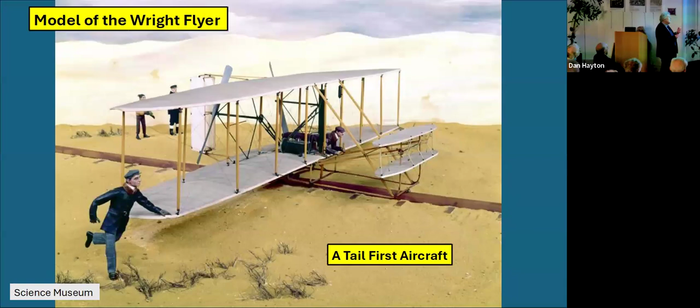Well, here is a better picture of the Wright aircraft, and we see Orville lying down, manipulating the controls, particularly the position of this tail here. All the Wright aircraft were tail-first, and this gave them very good flying properties, but it made them, particularly in the way they had the center of gravity of the aircraft, difficult to control.

I had to resent this comment about me taking up an interest in aircraft latterly - I've always been interested in aircraft, always. I didn't join the aircraft industry because I didn't think I'd got the mathematical ability to be there. But you see the kind of thing I was doing: this is round about 2004, when I wrote to the London Review of Books about a book which had just come out about the Wright brothers. Can you click?

What I said was the Wrights designed their aircraft to be unstable, knowing that with good controls like wing warping and rudders, they would be as easy to fly as the bicycles they had made. This was perhaps an overstatement - they didn't really understand about stability. What they did understand is that if you had good controls, you would have a safe aircraft. Like if you've got a bicycle with good steering and you've taught yourself to cycle, you've got something that you can fly, you can ride, and if it's an airplane, you can fly.

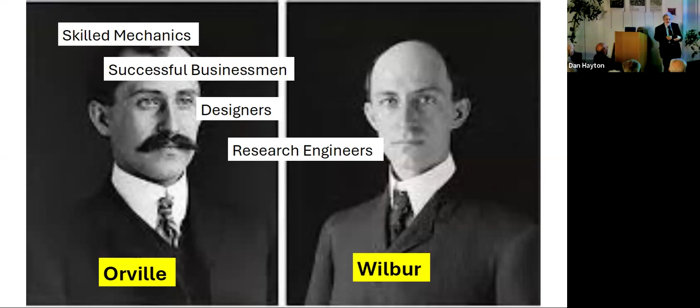Research engineers - they did a proper research job. You could spend a morning talking about what the Wrights had done in terms of aeronautical research, producing wing sections, getting lift-to-drag ratios and so forth, and criticizing what other people had done before their time.

And they were the first professional test pilots. Certainly in America, before they actually flew the Wright Flyer, they were testing gliders. They'd got to know how to handle aircraft. They knew what happens when an airplane goes wrong.

And this is the sort of thing they were doing as engineers and designers. Their aircraft, unlike many aircraft that had been built before their time, were structurally designed and sound. They were based on the Pratt truss idea that you've got with bridges. They'd got aerofoils, which they'd produced in their own wind tunnel.

They developed the idea of actually controlling an aircraft in all three dimensions - that's turning, going up and down, and rolling. Nobody else had thought about this in those kind of terms. They thought about aircraft stability, and they sacrificed aircraft stability to maximize lift. And it's one reason why their aircraft were able to fly.

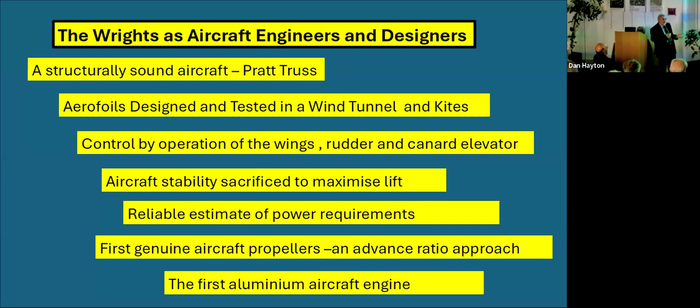Before they knew they needed an engine, they knew exactly how much power they needed to fly - they weren't guessing. And particularly important, they produced the first genuine aircraft propellers that anybody had ever made, because they designed their propellers on the basis of wing design. A propeller is a kind of wing which has got to hit the air at the right angle. And they couldn't get a good engine from anyone, so they designed their own engine. I think that's pretty good, isn't it, from so-called bicycle mechanics.

Here is the Wright's homegrown aircraft engine. Not particularly powerful. As I said, I didn't think if they tried to replicate what the Wrights had done in 1903, they would succeed, because the aircraft didn't have the right, just enough power.

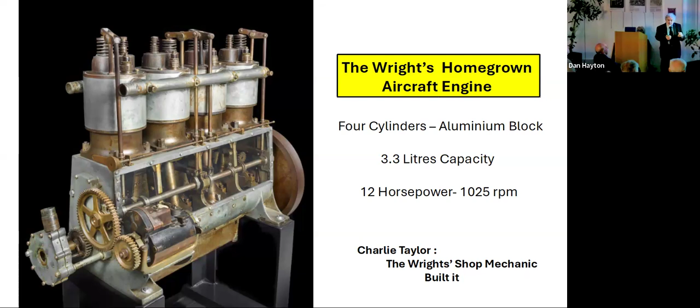It's an aluminium aircraft engine, the first one of its kind, built by the Wright shop mechanic but designed by the Wrights. And then we have the propellers.

If you look at the propellers people were coming up with before that era, and also when the French and others were trying to fly, you see the crudity of their propellers and that people just didn't have the right idea. They were thinking in terms of ships' propellers. The Wrights, when they looked into the subject, found there was no science to ships' propellers at that time. Ships' propellers work in water, rotating quite slowly in a high-density fluid. Aircraft propellers are quite different.

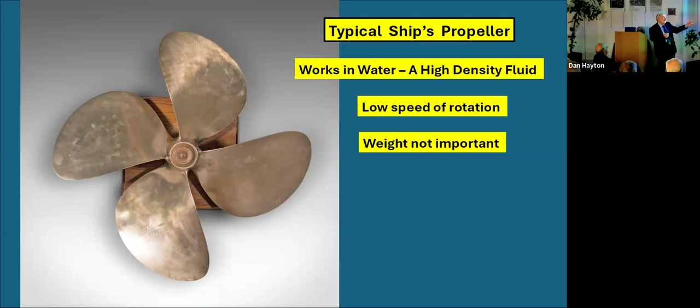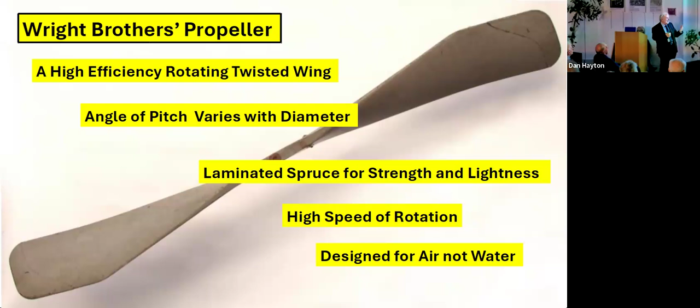Here we have a genuine Wright Brothers aircraft propeller. It's basically a wing twisted at the right point at various diameters, so it's hitting the air right - the angle of pitch varies with the diameter. It's made of high-strength wood, laminated spruce for strength and lightness, built for high speed of rotation, and designed for air, not water.

Well, we go back - this is the original picture, not colorized.

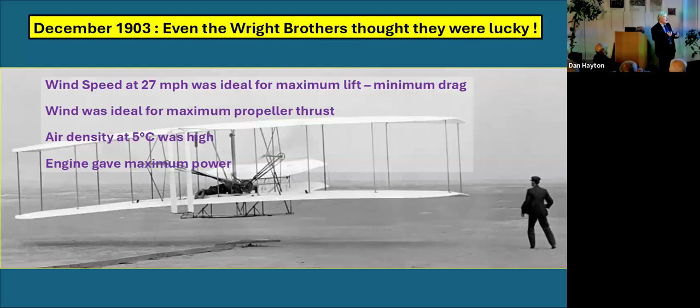They were very lucky. The wind speed at round about 27 miles an hour that day was just right. It's not realized by people who haven't gone into aircraft design that there is a particular speed at which, when the aircraft flies, the drag is a minimum. If you go below that speed, the drag gets higher, and most people know that above that speed the drag also gets higher. Because the wind was just right, you might argue that the Wright aircraft were wafted into the air.

It was also ideal for maximum propeller thrust, because they designed the propellers for about 27 to 30 miles an hour. The air was cold, so the air density was high, giving more thrust from the propeller. And because the air was cold, the engine was performing very, very well.

The Wright flyer was very unstable. It was only the fact that they were already skilled at piloting aircraft that a crash was avoided.

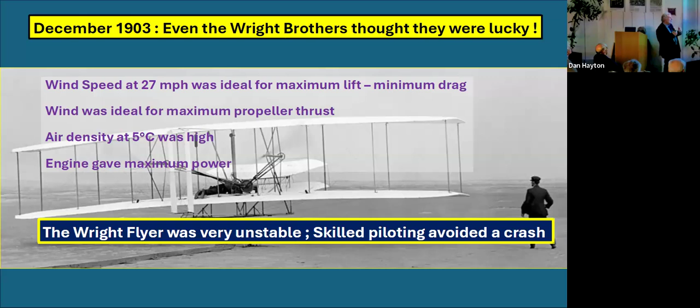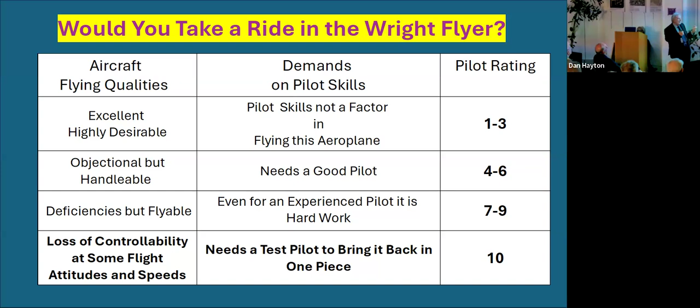This has been said about the Wright flyer: the Wrights were not only the first to fly, but managed to fly one of the most difficult to control aircraft in the past 100 years. That's coming from people who were doing the work about 20 years ago, looking into the Wright aircraft. They were extremely difficult to fly.

The focus in this talk is really about the planes going up and down in the air. But the Wright brothers found they had to be able to turn aircraft, and they mimicked the birds essentially by making the wings bend in the way that birds do.

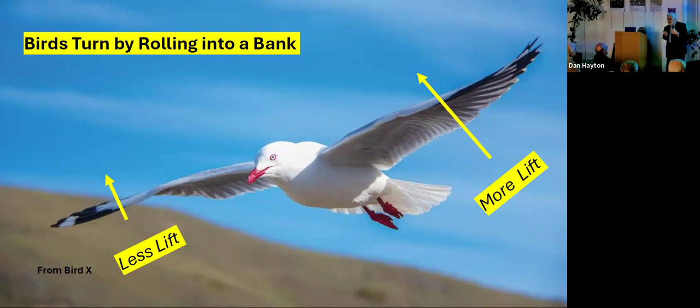What the Wrights were doing with their wings was bending the wings like this bird is doing - turning into the screen, as it were - so it's got less lift on that wing and more lift on the other wing. That's an entirely different subject, but that is what the Wrights were doing to enable them to fly properly.

I started off by saying the unusual thing about the Wright aircraft is that they had the tail first. Why did they do that? Well, they could actually see what the tail was doing.

If I could make a point about modern aircraft, some crashes have happened because the pilots simply cannot see what's happening to the ailerons, the rudder, and the elevators. They're completely relying on what's going on in the cockpit. The Wrights could see what was going on.

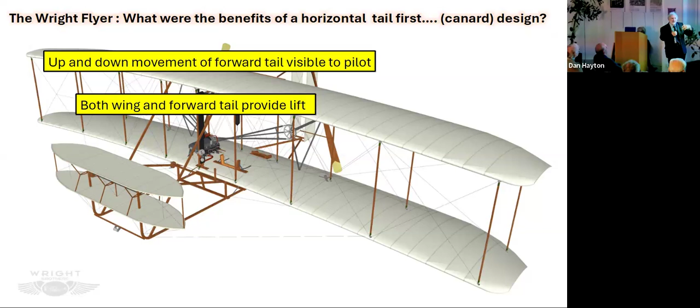A great advantage is that both the wing and the forward tail are providing lift. The tail in modern aircraft is actually reducing lift, forcing the aeroplane down. It's one reason why we're starting to switch to planes with this kind of forward tail, a canard.

Pilot given crash protection, and the aircraft is very maneuverable. Oh, and a mushy stall behavior - the way they got this, and also the center of gravity, is that if the aircraft ran out of lift, instead of going down in a nosedive, it just flopped onto the ground in a fairly easy manner.

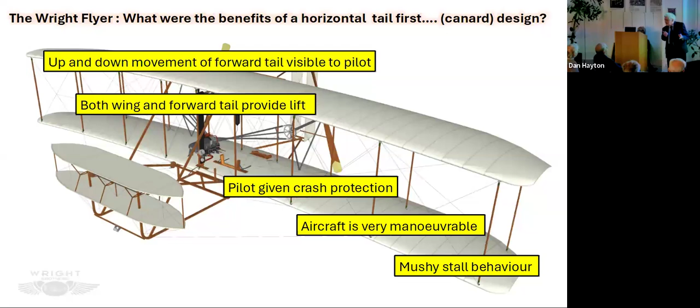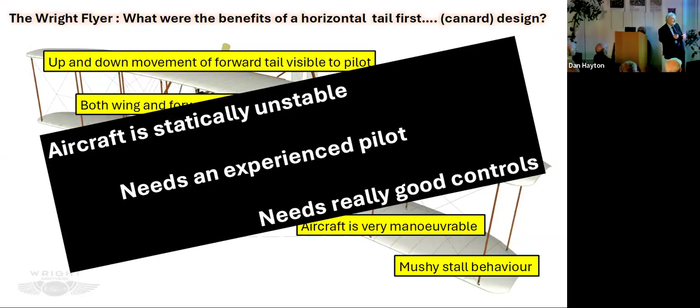But this means that the aircraft is, in aeronautical terms, statically unstable. It needs an experienced pilot and it needs really good controls.

By statically unstable, I think everyone here knows what the center of gravity is. It's the point whereby you could suspend the aircraft from a string and it would be absolutely level. The neutral point is an aeronautical term used to show how stable the aircraft is. It's not quite where all the lift forces act, but it's a useful aeronautical term. Let me go no further than that. And the distance between those two points is called a static margin.

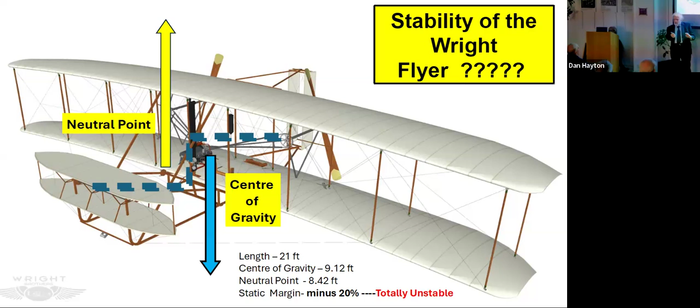It's always got to be positive, but the Wrights had got a negative static margin of about -20%, totally unstable. This is what happened. Either it wanted to climb or it wanted to dive. It needed an experienced pilot to control its behavior.

What these people were doing 20 years back was saying, well, what would have happened if we'd been flying the Wright Flyer? And this is the kind of motion. It's up and down because the model aircraft is in a wind tunnel. They're feeling the forces on it, and they know whether the forces are causing the airplane to go up or down.

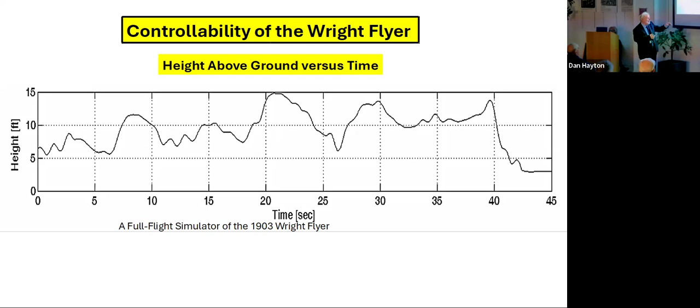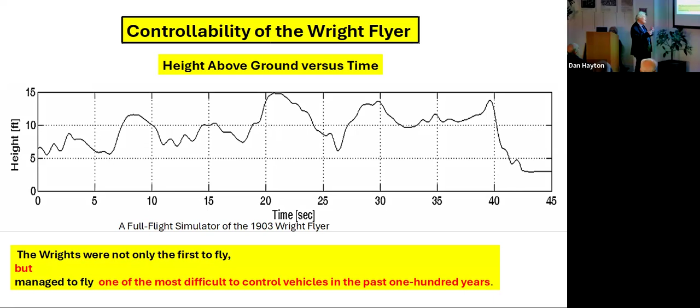And this is the result. The airplane is just not flying straight and level. It's continually going up and down until, I think at this point, the chap running the wind tunnel gets too tired of trying to do it, and he just gives up. And effectively, the aircraft starts to crash. So once again, the Wrights were not only the first to fly, but managed to fly one of the most difficult aircraft to fly in the last 100 years.

This is the kind of thing that was going on in these tests. They were having to manipulate the controls so much. You're talking about 23 control movements in 5 seconds.

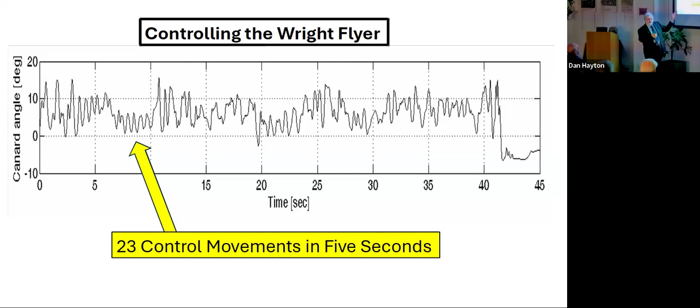Now, think about driving a car. Are you having to do that as much as that? You're talking about maybe at the most one movement, even in difficult circumstances, probably about once every half a second. This is getting beyond human tolerance.

Well, the 1903 model was very unstable. They did some more work in 1904. Then in 1905, they sat back and did not quite a complete redesign, but they knew that they needed more wing area, a more powerful engine, and in particular, they had to make the aircraft more stable. The way they did that is they moved the center of gravity of the whole aircraft forward, and they put on a bigger canard to control the up and down motion, and a bigger rudder to help control left and right movements.

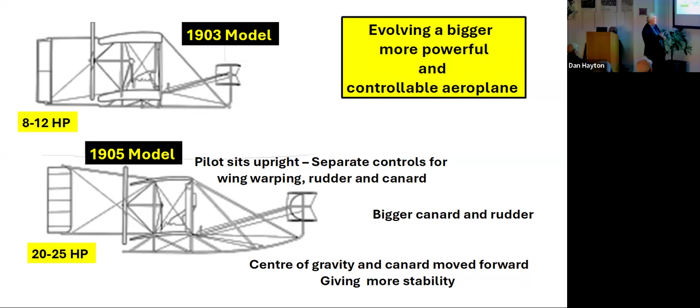And this is what they came up with. From hops of 250 yards or so in 1903, here is flying from a field not very far from, which was on the outskirts of Dayton, flying 24 miles in 39 minutes. They only stopped because the engine ran out of fuel.

Well, they got a lot of adulation, but the French in particular said, well, they're very good, but you really need to be a very good pilot to be flying the Wright aircraft. We think it's better to have tails on the aircraft. They're much more easy to control. This static margin, which nobody knew about for the next 20 years or so,

becomes positive. And that's how airplanes have been, what they've been like ever since, with a tail at the back, until quite recently.

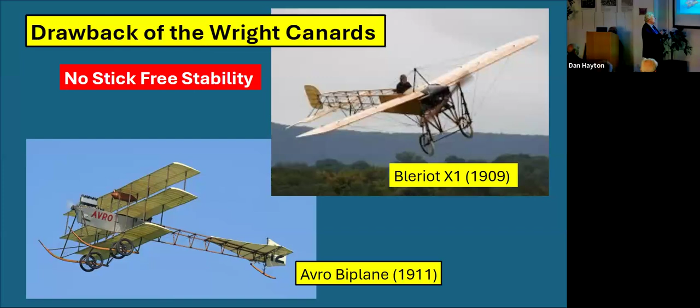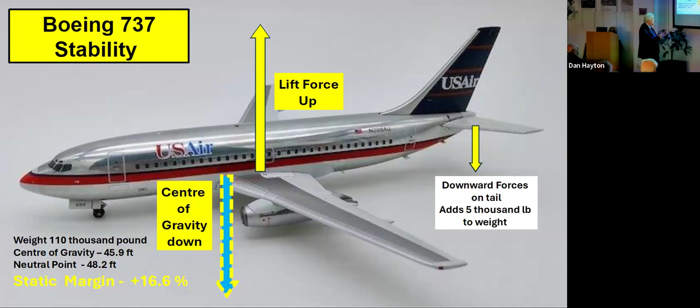Well, people have looked at canard aircraft back in the 1940s. It was quite clear that the piston engine aircraft was reaching the end of the line, and people were looking for better ways of designing them. And one way was to go for this canard type. And we have the XP55 Ascender.

It was fast, but 3 out of 4 prototypes crashed. Because if you really want to try and make a canard aircraft stable, you've got to put the center of gravity quite a bit forward. It means that the canard is producing a lot of lift. If it stalls, that's it. You can't do anything about it. It's worse than an aeroplane with a tail.

But they've come in various odd ways. We have where you're looking for very good range and you haven't got a lot of power.

The first cross-channel man-powered flight was the Gossamer Albatross, and you've got the canard up front. That's maximizing the lift of the aircraft. The tail, the ordinary tail, is wasting energy. And if you're pedaling an airplane, you haven't got very much energy to spare.

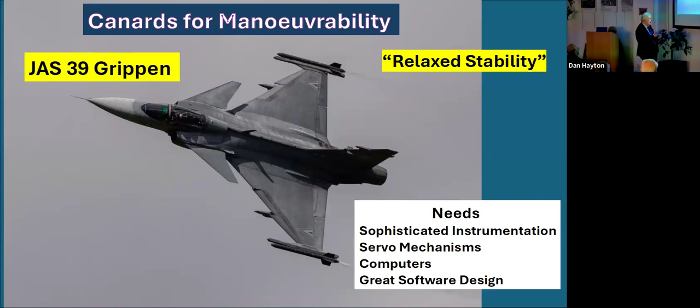This was the first attempt at doing this. This is a Swedish aircraft. It needed sophisticated instrumentation, servo mechanisms, computers, fantastic software design, because what is going on is that the aircraft is supposed to go the way that the pilot is moving the controls. So just to make sure the electrics work properly, we've got 4 pieces of wiring going to each system in the aircraft.

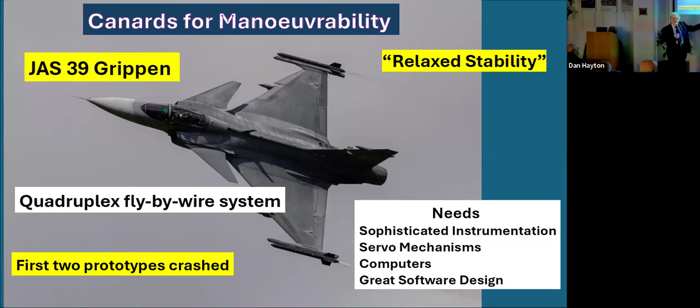The first 2 prototypes crashed. And that was put down to bad software design.

But I mentioned earlier that one of the problems with that XP-55 in the 1940s is that once the canard lost lift, you were in real problems. Well, I think this is why on the Eurofighter, you've got the canard able to move over such a wide range of incidences, so that if the aircraft starts to stall, you can get the canard flying again and at least try to recover.

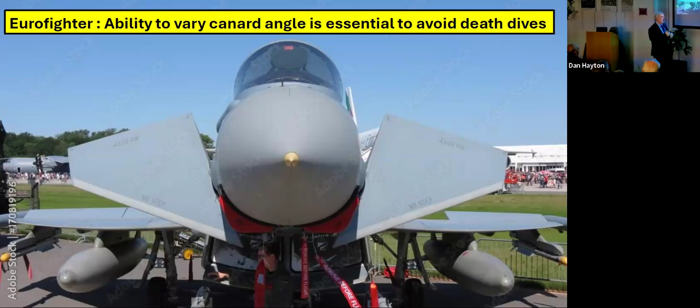The weak point in all of these systems is probably not so much the software, it's the instrumentation. You need good instrumentation.

It crashed because the sensors on the aircraft got wet and stopped working. The computer couldn't deal with that. It took the airplane into the air and caused it to stall and crashed. And there was $2 billion. I think even President Trump would want to know about that.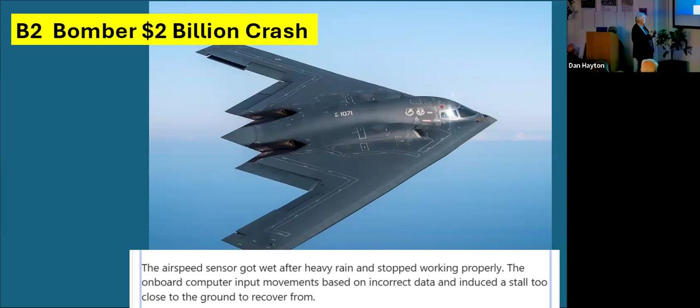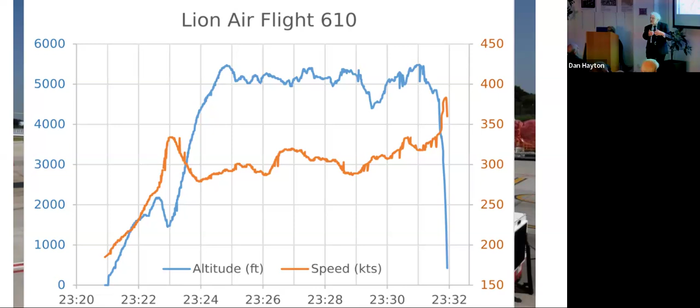And you'll see, hopefully... I hope we're not going to have to wait 3 minutes.

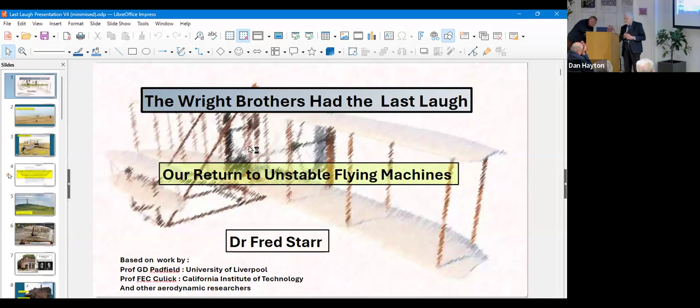Right, you say these bicycle repair people suddenly thought, oh, we're getting into flying. Well, middle Ohio, a long way in the middle of America - where did they get the inspiration, who were they finding out about flying from? The story is that their father brought home a toy helicopter. This must have been when they were about 10 or 11, and they kept up a general interest. I think the idea of flying was probably in the air as much as going to the moon was later.

But when did they start gliding? This was around 1901. That was quite late, because there was a lot of gliding going on before then. Well, if you look in the Newcomen Archive, there's a paper from 1903 on George Cayley's diaries, and Orville Wright wrote in reply, having got a preprint of the paper, saying he felt Cayley understood aerodynamics better than anyone until Lilienthal at the end of the 19th century. So there was a lot going on - they weren't just bicycle mechanics.